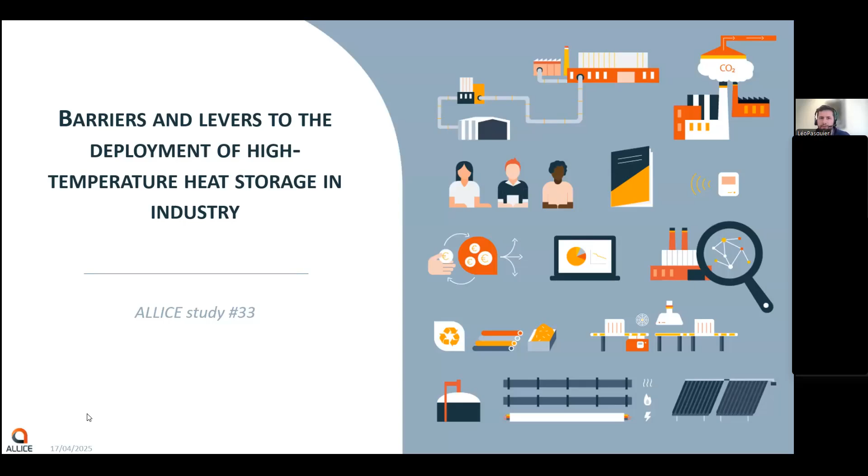Present some results of our recent study about barriers and levers to the deployment of heat storage in industry. And at first...

We are an industrial alliance created in 2018 to bring together all the players from the value chain of industry, from solution providers to manufacturers, financiers and specifiers, utility providers, etc., in order to support the development of an offer, but also to support manufacturers in accelerating their decarbonization. You can see below our areas of intervention, and energy storage, heat storage, would be between energy efficiency and potentially integration of alternative energies if we include heat recovery, recovered heat, in this area.

We are funded mostly from our members. We are independent. And our activities are split in four main axes. The bigger one is the collective studies, production, and monitoring.

We have around 10 studies every year about decarbonization pain points, technical points, delivered to our community. And they are voted by our members. So that's the reason I've presented this. And so the members voted for a study on heat storage and barriers and levers, which is a message I wanted to point out. We have some activities of coordination within the network and also promoting the decarbonization sector.

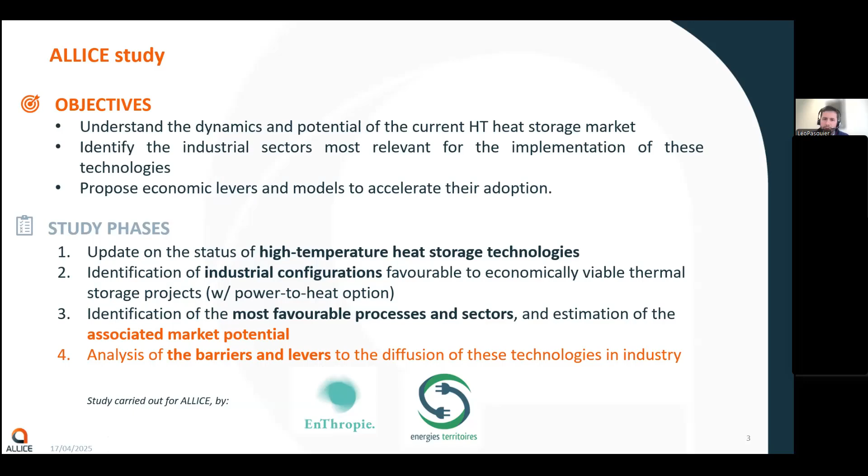And the part I will emphasize here are the identification of the most favorable processes and sectors, an estimation of the market, and the barriers and levers for the diffusion of these technologies in industry.

So what is industrial heat storage? Very quickly: storing flow heat in a storage facility, whether it's sensible, latent, or chemical. At first, heat storage was designed to recover waste heat to optimize consumption. And this is what we can see here.

We have a high-level scheme of an industrial process with a heat generator, a first unit operation at high temperature, where we can have waste heat. We can store that waste heat in thermal storage, and we can just reuse this waste heat for the same operation potentially, especially if it's a batch process.

But we also have heat storage especially interesting for processes with asynchronous operating modes. So you can just transfer the heat from the thermal storage to a second operation. You can also use it for electricity generation, for off-site recovery, for domestic hot water production on site, etc. So that's the general case.

I would like to add the reason we have a new study: we've had a previous study that was more state-of-the-art of the technologies, and there are various studies in France, but also I'm sure in Europe. There have been studies in the past, but still there are only a few projects, like demonstrators - it's not an industrialization of the technologies as of now. So we wanted to focus on the levers and barriers, and it was voted by our members.

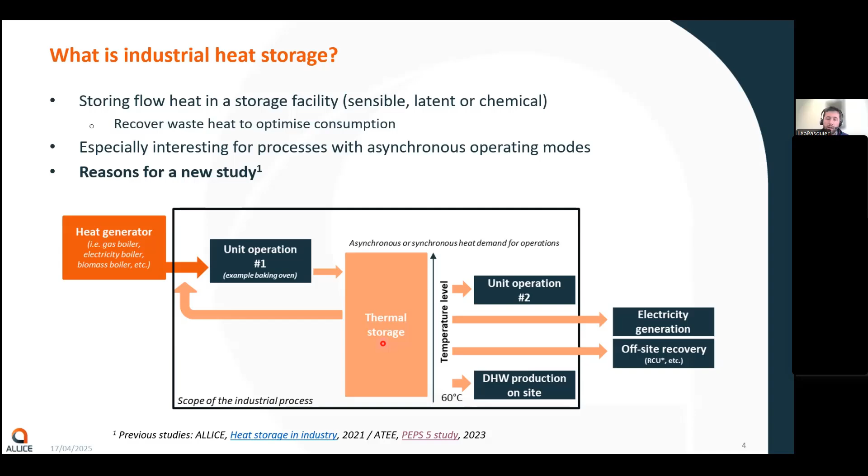I've introduced the previous drawing also to share the scope of our study, where we've considered what we call high temperature heat storage - above 150 degrees, because for lower temperature, water storage or superheated water storage covers perfectly well the applications. And an intraday storage duration - we've excluded other long durations, seasonal durations, because that's the majority adapted to industrial processes.

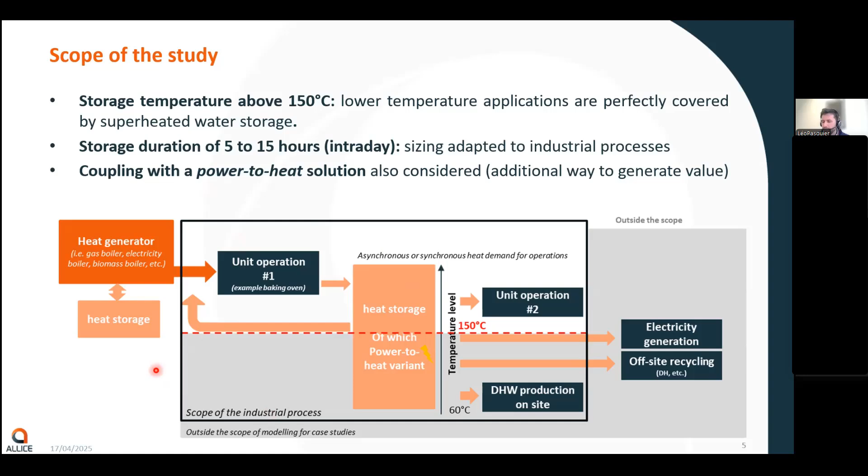And we've also considered the coupling with a power-to-heat solution. So it can be here for the heat generation directly, where you have a heat storage via power-to-heat, or with the storage to generate an additional value.

To carry out the studies, we've interviewed several players. We've interviewed four technology developers here, but also service companies, either carrying out engineering, financing, or this association - this is a paper association, actually - and also manufacturers directly.

So I've put this slide on the technologies. Each technology has been described for the community in a topic sheet. I believe you have all the information in the TCP, more or less, and it wasn't too detailed.

We have latent storage and sensible storage. The most mature technologies are thermocline in water technology, as well as steam accumulators for some cases, and also multi-tanks in molten salts.

The arrows legend here can be a little disturbing. We've put yellow for the more mature technologies, but they are at the roof, let's say, of their potential, while the green arrows are less mature but promising for the future. So those are emerging technologies.

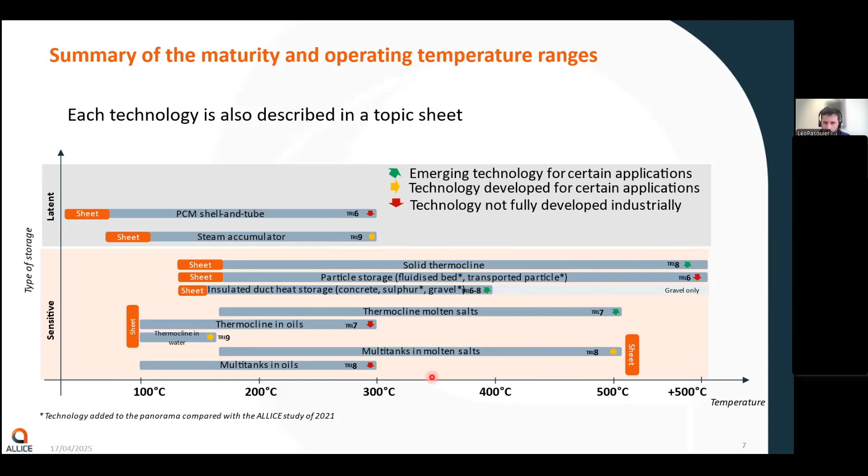Then we wanted to give our members the most interesting industrial sectors in terms of potential. Coming from the interviews, it appears that high temperature storage has interest for batch operations, especially when you have to manage a process discontinuity between continuous and batch operations, with operating constraints usually found, such as the need to control the operating conditions.

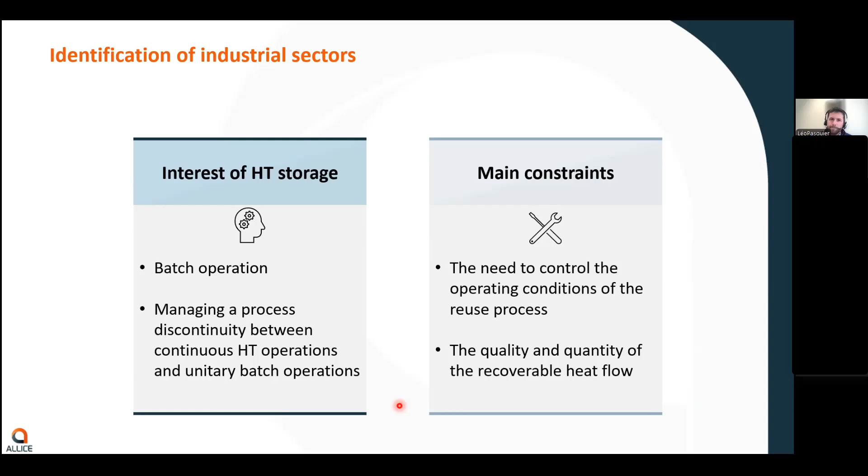Based on these parameters, we've identified 3 or 4 sectors interesting for high temperature thermal storage: steel making and metal surface treatment, mostly because of the use of batch operations there, firing and treatment of ceramics, as well as the brick and tile industries.

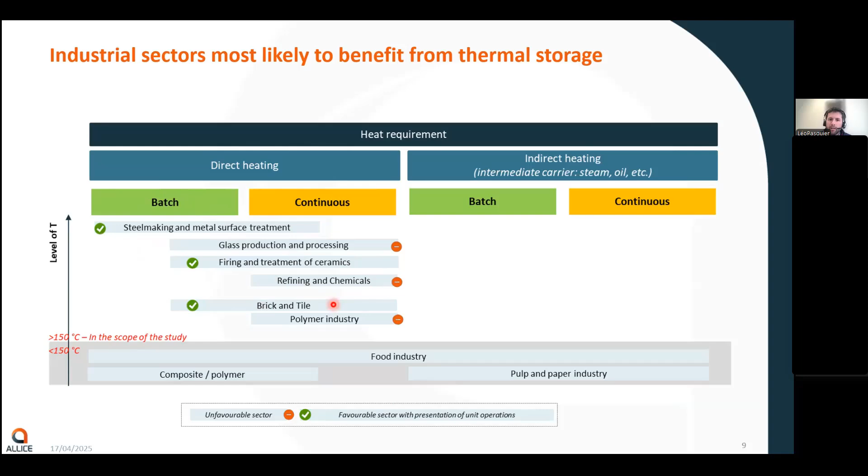Once we've done these preliminary steps, we've tried to quantify the market for high temperature heat storage. We've made two market studies: one for excess heat, and another one for power to heat for steam generation.

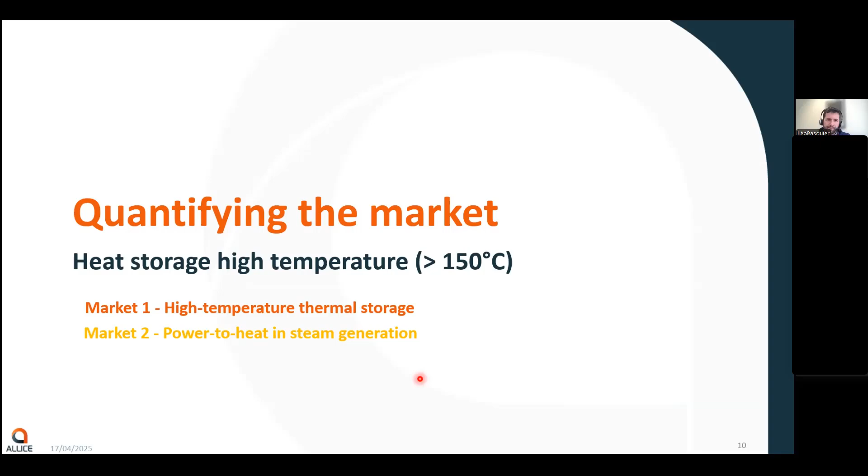How did we do that? We've used reference studies in France, because we've separated the French potential market and the European one. For the French potential market, we have a reference study by ADEME, the French National Energy Agency, which had an update in 2022, but the reference is this one, as well as a French white certificates potential that gave some figures about the addressable deposit, or the addressable potential.

And in Europe, we found only one study, on industrial waste heat, dated from 2017. So it was our only reference here, but we've used it. I will comment on that later.

The methodology was quite simple. We have the potential for waste heat in industry, with cutoff points above 150 degrees and for favorable sectors, and then we've translated it into a capex to be deployed.

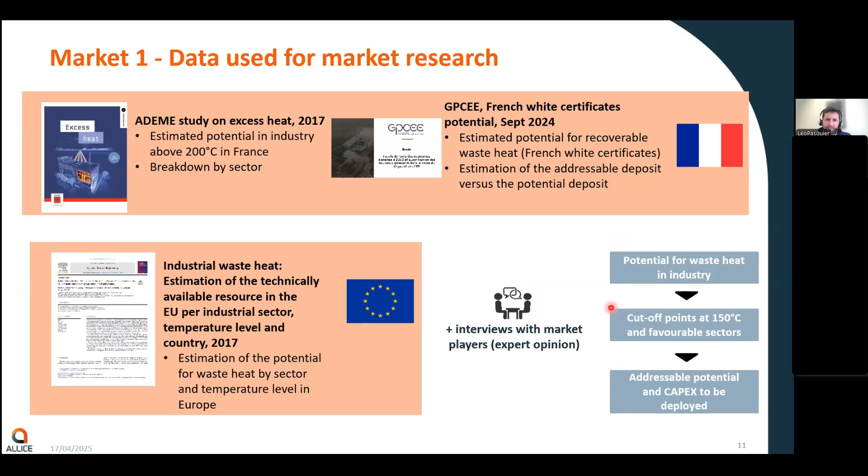My comment is that the two studies don't really match in terms of figures when we look at the potential in France, where we have more than 100 terawatt-hours in the ADEME document, which I'm very familiar with, versus only 30 terawatt-hours identified in the reference study. So this warning reflects the difficulty of getting accurate numbers. The idea was more to consider the orders of magnitude rather than the accuracy of the data itself.

So here you have the methodology summarized, but that was quite simple in the end. It's only on this slide.

Waste heat was considered at 300 terawatt-hours, but we've adjusted it a little since it sounded like a prudent estimation. So for above 150 degrees, we worked with 200 terawatt-hours. From the expert interviews as well as the white certificate report, they mentioned that probably 10% of the waste heat is addressable, which leaves only 20 terawatt-hours, quite considerable.

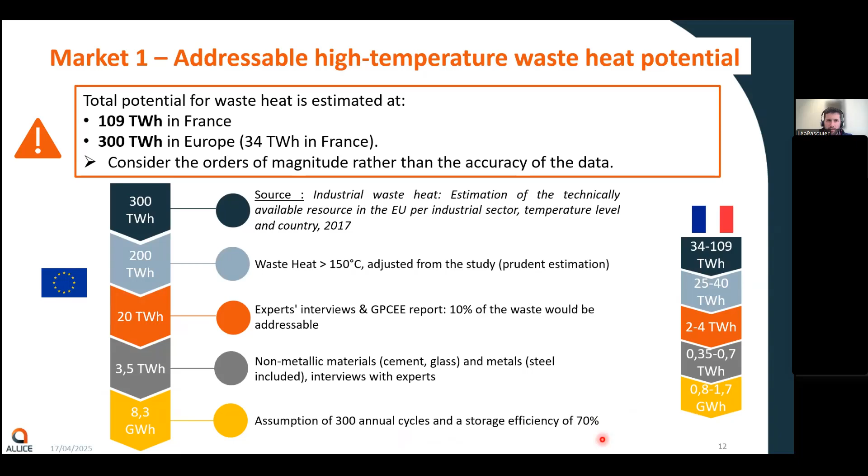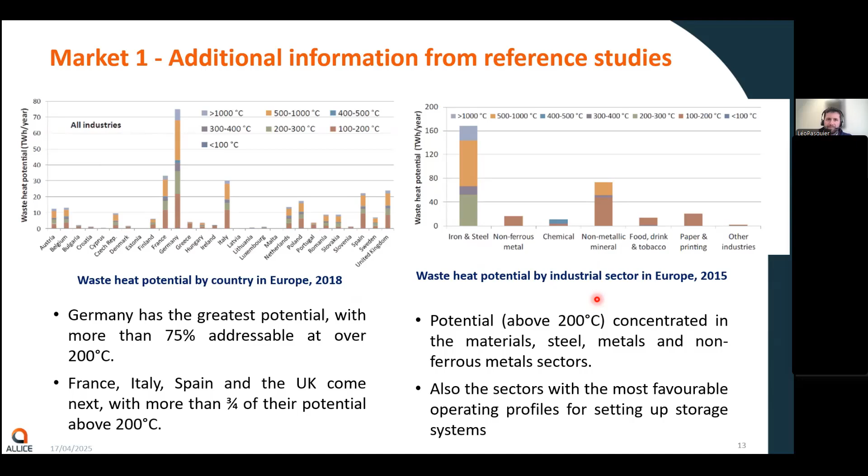So that's it for the market potential, heat storage, considering waste heat. We've also considered power to heat because that sounds like a very promising lever for the future. In France, we've based this on two different studies, from ADEME and CEREN, which is a statistical center about industry figures in France, and from a previous study also financed by ADEME that we realized in 2022, which is publicly available. If you are interested, feel free to download it from the ALLICE website. For the EU, we've based our figures on the World Energy Outlook from 2022 from the IEA.

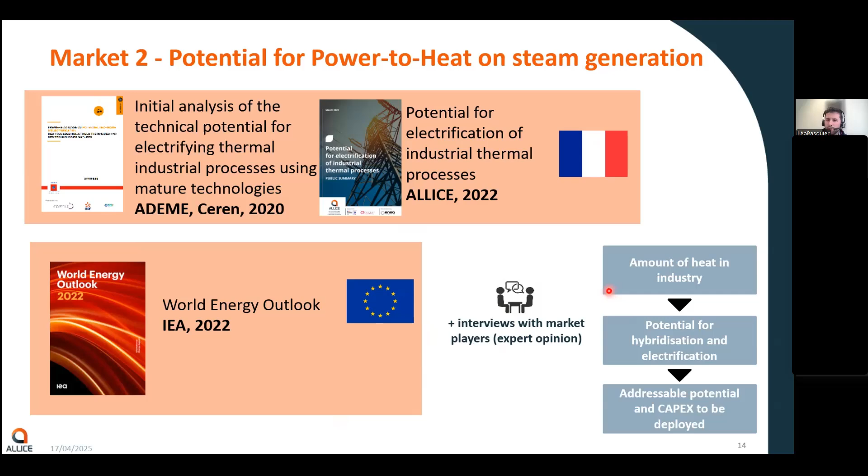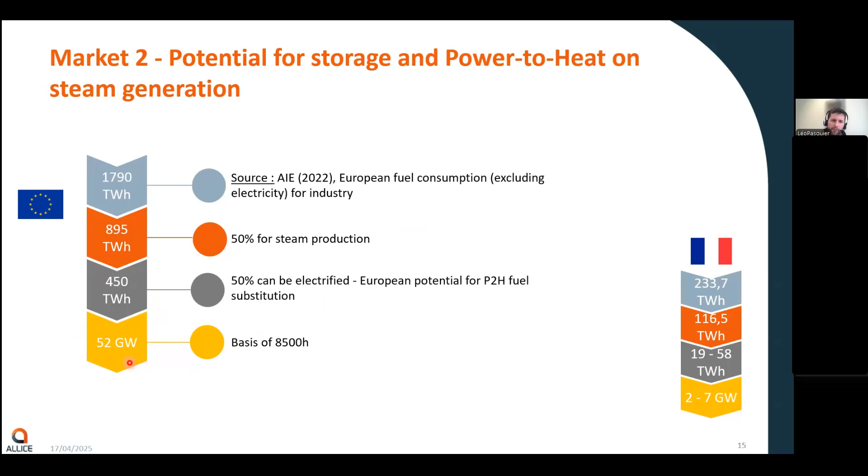Here we've considered the amount of heat in industry, the potential of this heat for hybridization or electrification, and afterwards we deduced the capex to be deployed. The results of this methodology, if we take the IEA source, give 1,800 terawatt hours, with a 50% hypothesis used for steam production, which leaves us with this figure, and 50% can be electrified, which gives us a European potential for power to heat fuel substitution. That's quite optimistic if we want to consider that all this energy will be addressed via power to heat, but that's a potential. Based on yearly use, that gives 52 gigawatts of power.

What we want to highlight from this market data will be interesting with the value chain comment later on. If we consider capex costs as mentioned, with an average cost by project between 500 kilo euros or 1.5 million, we can convert these heat needs into a billion euros and a number of projects. The key figure here is that if you consider the addressable potential with power to heat, you get 30 times more market and projects. That's a very big difference, and again, with the hypothesis, that's the order of magnitude that is interesting.

We realize that the potential for waste heat storage is still huge, 3 terawatt hours, but it's limited. So the power to heat potential is much bigger, much deeper. That's the key message, let's say, with this market study.

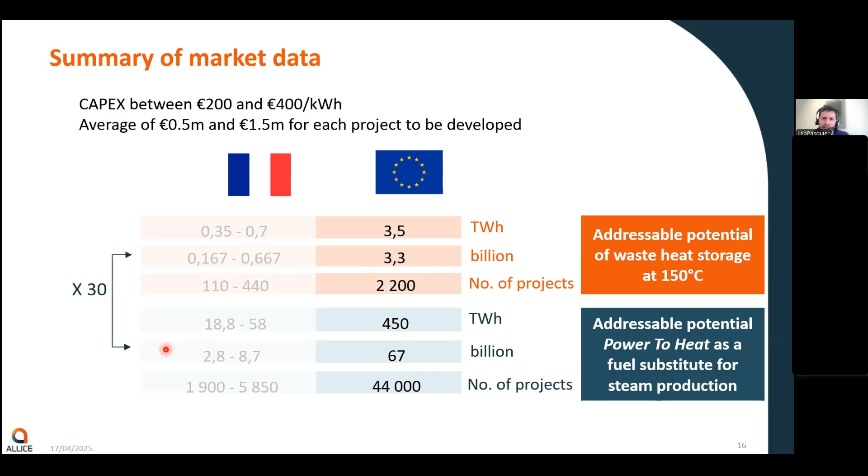I would like to do a little sidestep, since we have some experts gathered here, because I've learned recently that the German government had a law in application since November 2023, forcing companies to provide data about waste heat. I believe this is huge progress for our community, for industry decarbonization in general. If you are not aware of that, you can look it up, there's an Excel file you can download with all the data. Probably it's since January this year that they're feeding the data, but it was already complete when I looked at it. It's a good initiative, and I'm trying to promote it in France as well, but we'll see how it goes.

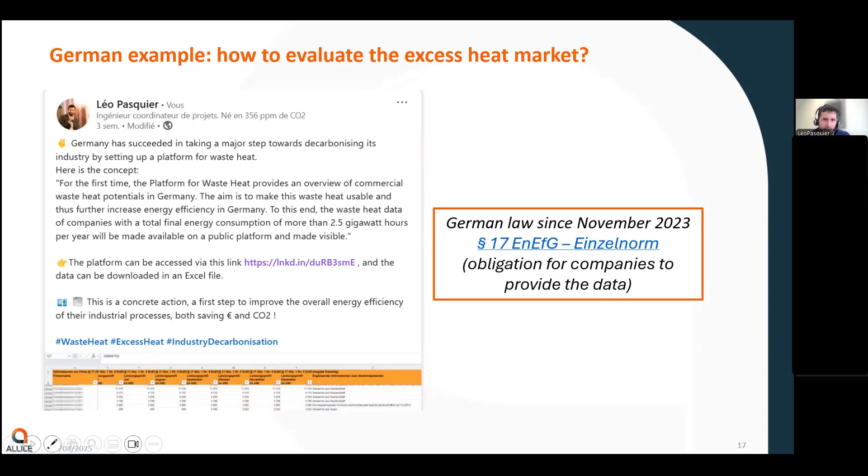Coming back to the study, an important part was really to understand the levers and barriers for high temperature thermal storage in industry to develop, and looking at the value chain was necessary. A heat storage project depends on the typical value chain of any energy project development in industry, where usually you have various players involved: project developers, financiers, design offices, equipment manufacturers, etc. You have this project development stage with feasibility studies, financing, engineering, procurement, and construction, and the life of the project with operations and maintenance.

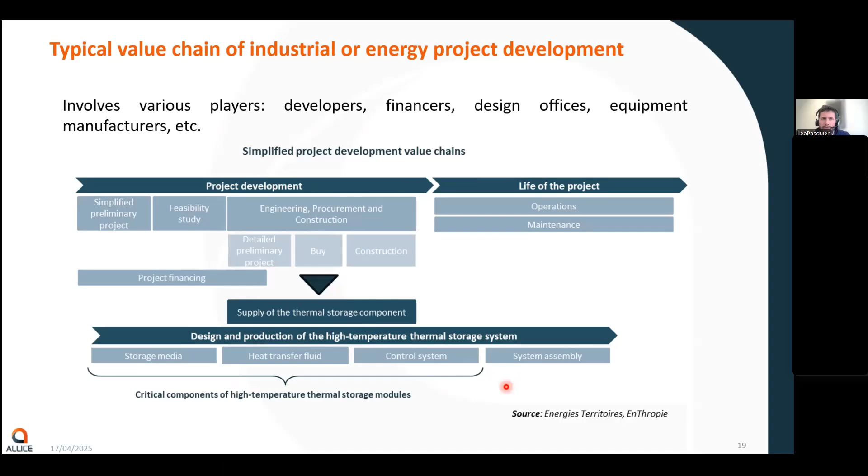For heat storage, we have the thermal storage component, and the critical components are the storage media, the heat transfer fluid, and the control system, which are left to the solution providers. If we take the typical value chain, first project developers play a role to accelerate the standardization of projects by controlling project risks. For heat storage, we have Enel that recently launched into this area. It should be followed by other energy service companies, but it's just starting.

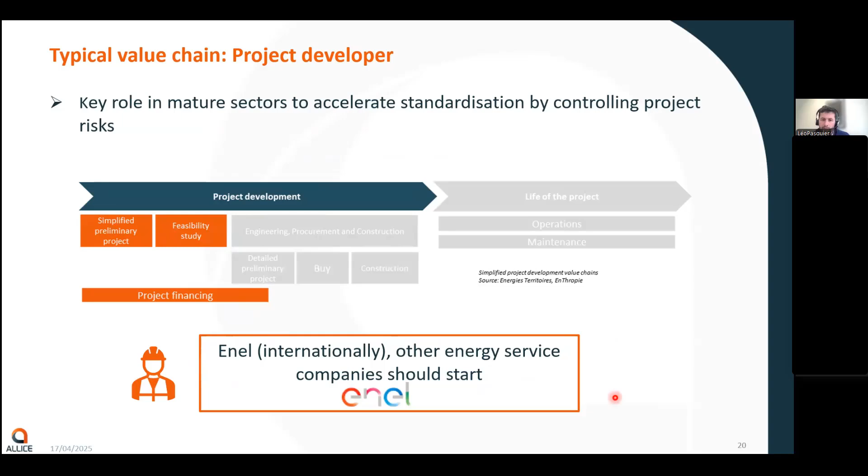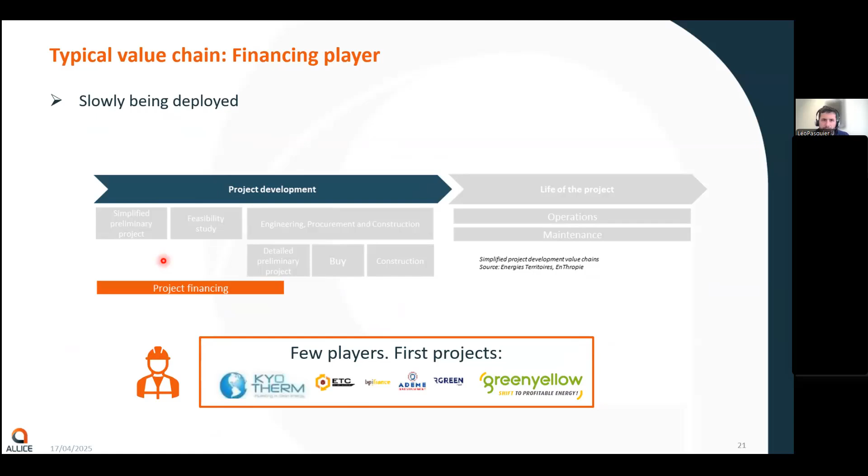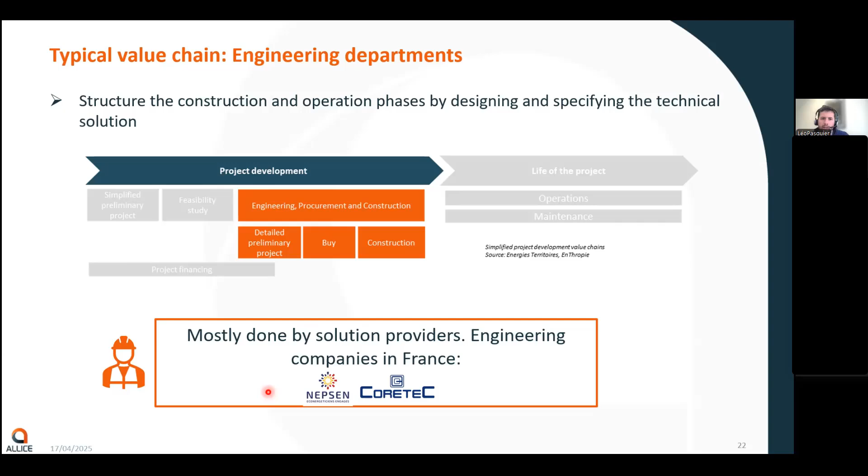For the financing part, it is being deployed for the first projects launched. We've highlighted a few actors, a few players here, but it's still slowly being deployed. Regarding engineering, procurement, and construction, this is mostly done by solution providers today. We are aware of some engineering companies in France getting into these competences and market, but that's still minor. The installation of equipment is mostly done by the solution provider for the engineering and procurement part, and by local companies for the civil engineering.

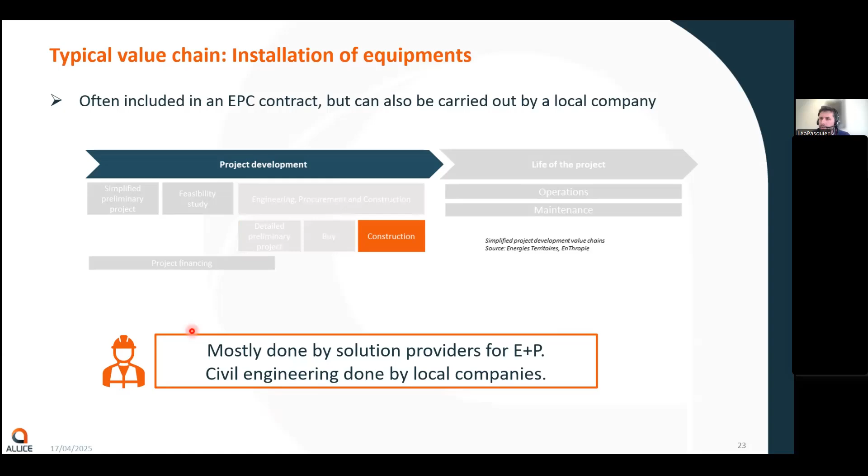And finally, operation and maintenance. So two things here. It's supposed to be of little constraint for heat storage systems and integrated by users. But also, on the other hand, we have for now too low a volume of projects and installations, and so there are no players integrating this task as of now, at least not for the majority of projects.

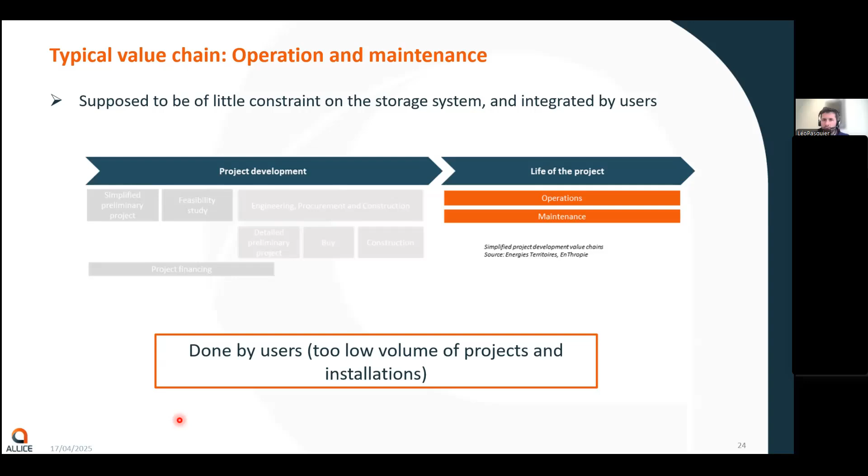I would be interested to hear your questions about everything here. Maybe a keynote I forgot to mention is that the solution provider still plays a major role at several steps of the project today, because this is an emerging market, and they have to take care that the thermal storage is correctly sized, etc. They are critical in the project development and lifecycle.

Just giving an overview of the market for solution providers, you can have three options represented on the market. There is design and license, where this is mostly R&D, developing the technology in the form of a license. You have design and manufacture, where the solution provider or technology provider will design and produce the equipment as an equipment manufacturer. And you have design and commercialization, where the player produces the technology but also sells it directly to customers and can even finance it in some cases.

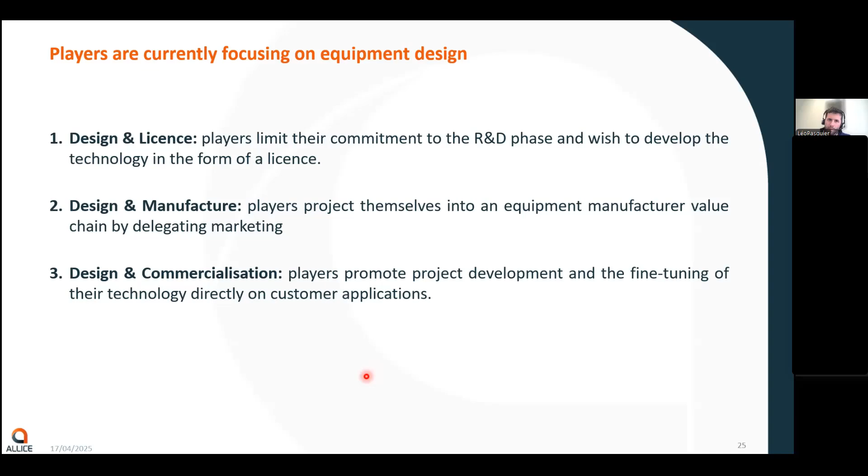What we've noticed from the interviews given to these different stakeholders is that currently, the few projects launched in the industry are either marketed by solution providers with direct contact with industrials, or by players in the energy or utility sector, in which case the solution technology provider is not directly in contact with industrials. What has been highlighted from the studies and interviews is that in both cases, the solution provider has a significant role in the project engineering, and it leads to two potential problems.

So the solution providers first include engineering and design services in their offer in order to get projects, which sounds reasonable, but still it will feed, let's say, the miscellaneous technologies, the variety of technologies, and therefore the engineering firms will have trouble offering standard solutions and decreasing their costs in developing these projects.

On the other hand, solution providers can also market their technologies directly, and by doing so bypass specifiers, engineering firms, or even financing solutions, and in the end discourage those players from positioning themselves, whereas those players could be a relay for the dissemination of technologies. So that's the two main barriers we've seen with the value chain, which is normal for an emerging sector, but probably needs to evolve to get industrialized.

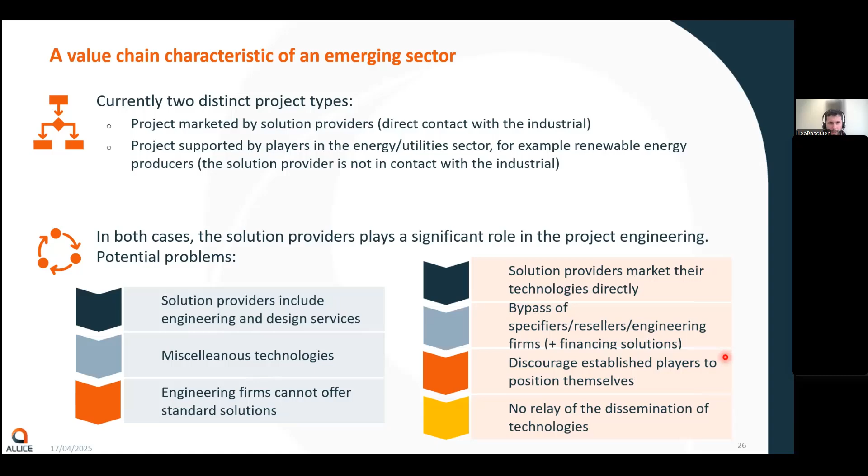And we'll have the conclusions and recommendations. I will conclude my presentation after these slides.

So the conclusion of our study is, as said, few sectors are really targeted for heat storage: steel making, metal processing, ceramics production, and brick and tile production, with discontinuous unit operations. But with these cases, the market is a bit small and limits the emergence of real industrialization of the sector.

On the other hand, the market for thermal storage with power-to-heat for steam production gives a 30 times deeper market, and also, I've not mentioned it, but of course a new source of revenue for projects with electricity grid services that you would provide to the electricity grid operators through demand side flexibility.

And another important barrier to industrialization is the lack of a standard or standardization, holding back third parties. So again, the power-to-heat market, with its big size, could encourage a dominant design and provide standardization of the designs.

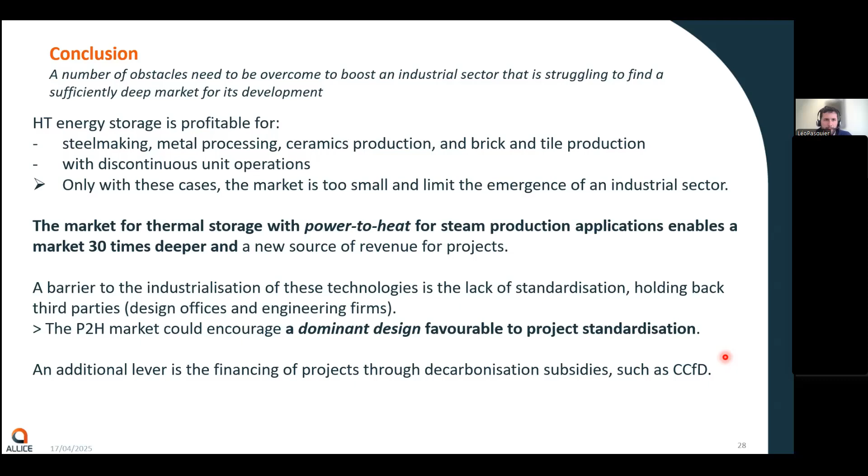And the last lever would be the financing levers, subsidies that you could get, for example, from carbon contracts for difference. And I have 4 recommendations out of the study.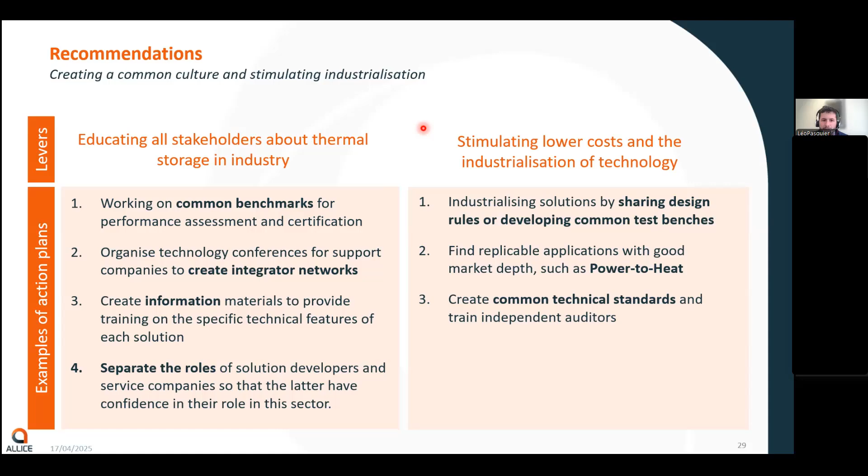And the two last recommendations axis would be to simplify the risk analysis for the project to get financed and generate the maximum value for a project. And I'm a bit long in timing, so I will just give a few ideas.

Propose a white certificates sheet. For example, it has been done in France now since the 1st of January. There is a white certificate standard that includes power to heat, actually, from waste heat. Develop a map of sources of waste heat to facilitate reuse, as we've seen with Germany, for example. We have it also in France actually, but there is no obligation from the companies to feed data,

and therefore it's not complete as of today. But definitely this could help to facilitate the reuse. And another idea could be to structure a guarantee fund between project developers or solution providers to promote the adoption of this technology.

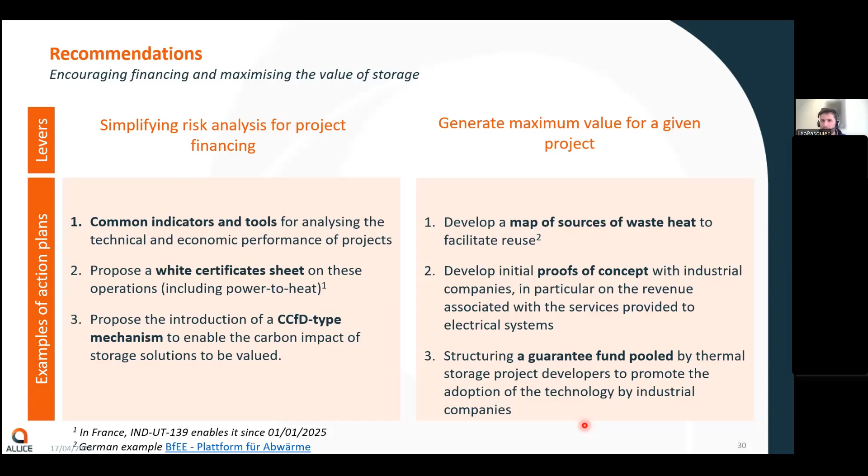And so that's all the wrap up. We've had actually lots of ideas. I've tried to summarize them and put the most important ones here, and would be happy to discuss them with you.

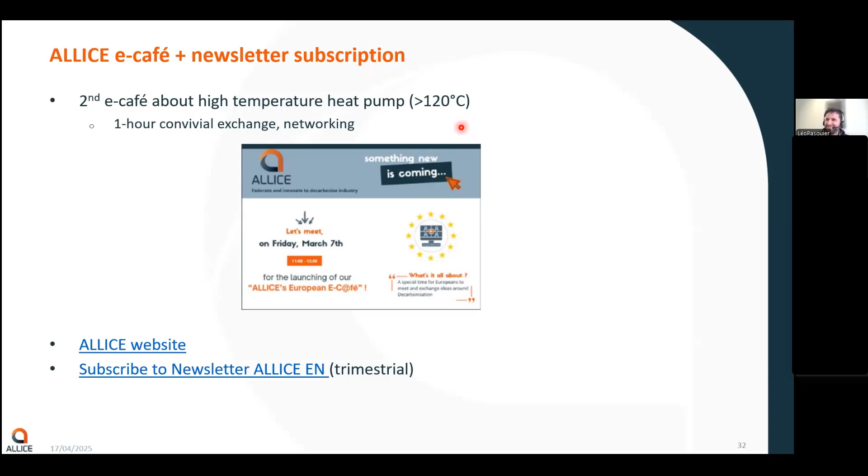Okay, so yeah, thank you very much for your presentation. Yeah, first of all, I'm very, very curious to look in more detail into everything. It seems like a very interesting work. I think before we start with the questions from the audience, because I think there will be some,

it's good that you mentioned also the waste heat platform, which is new in Germany. I also put it in the chat so people can directly connect. Just maybe a little disclaimer for everyone who will use it and cannot read German, which I can totally understand. It's important to understand that the Excel sheet does not list all companies, because some of them, I think around 20%, are missing, if I'm not wrong, but these are the ones with the highest waste heat in numbers. They maybe will be added later, but because of some kind of, how is it called in English?

Safety reasons, so they don't want to give too many details. They are not now part of the list, in case you wonder if the numbers are sometimes a bit different. But so I think it's a good thing as well. And yeah, I was quite happy that it exists now. I was waiting for it for a year. Yeah, I'm waiting for it. Yes. Well, it exists, but there is no data in France. Well, there is data, but from the collectivities, only a few from industry. Yes. So yeah, but at least some first steps are made. This is very good. Yes.